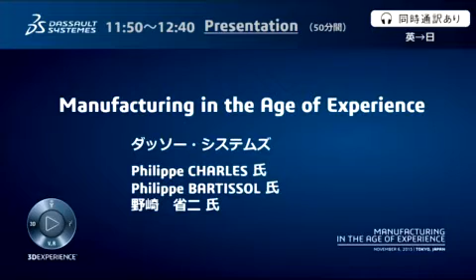Good morning. It's a great pleasure to be here. Thank you very much for joining this manufacturing event. It's my pleasure to share with you what we are doing at Dassault Systèmes to support this manufacturing transformation.

Up to now, we do see manufacturing being more a race for productivity. This race for productivity has been delivering tremendous value and benefits to serve customers in multiple industries.

What we see coming now is also a race for innovation. Innovation is everywhere when it comes to product, and you heard a lot of great cases this morning. Innovation is also there

for manufacturing. Manufacturing innovation is for sure part of the transformation that we see coming, as important as the race that has been ongoing for productivity. The digital transformation mentioned several times this morning is for sure a key enabler to make possible and support this innovation process.

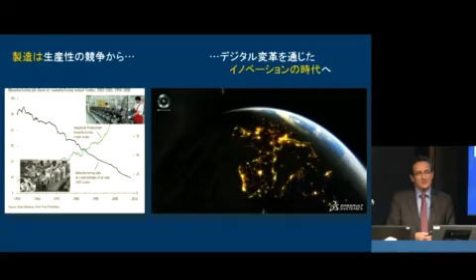When we talk about digital transformation, it's not only about transforming existing processes, not only digitizing existing processes, but also the opportunity to change, to transform the way things are done in the manufacturing world within the global ecosystem, and also take advantage of the possibility of changing business models.

As part of this digital transformation, the so-called digital twin of manufacturing and production system is a key enabler to support this transformation, and a key enabler to allow the reconfiguration and recomposition of the value chain, which is a key driver in this business transformation.

This digital twin of production system applies at all levels of manufacturing, from the simplest station as a manufacturing capability to the whole production system as a network of manufacturing resources.

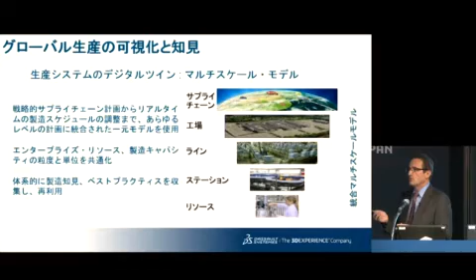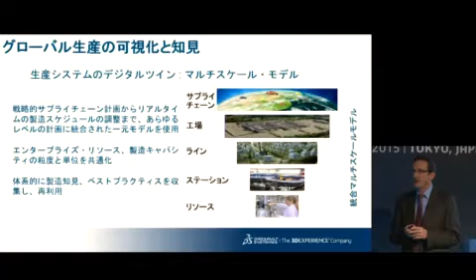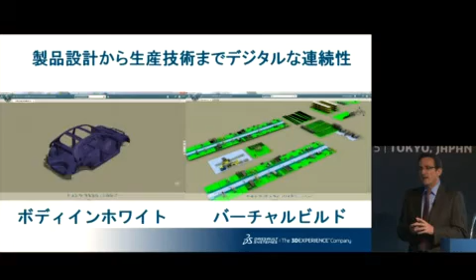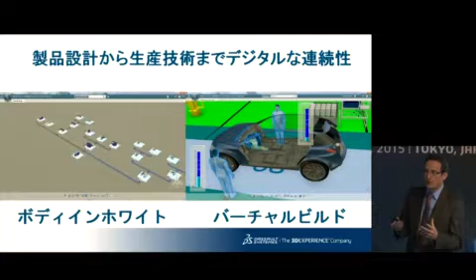And this is the opportunity to enable collaboration across disciplines, collaboration coming from the product engineering activity, which is key and enables real collaboration, leveraging the digital asset, the digital definition of the products, including all its innovation. So the production engineering could be completely developed, planned, tested, and validated in the virtual world.

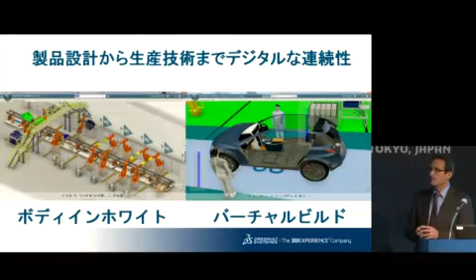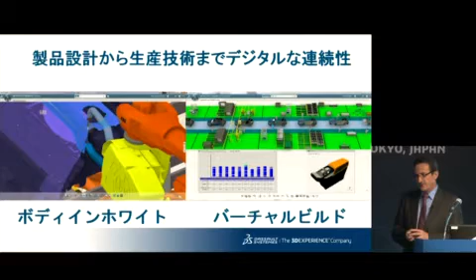Here in front of you, you see two examples. One is coming from the automotive industry, the standard process of body in white, where the complete digitalization of the body of the car is a key enabler that could be leveraged in the production engineering activity.

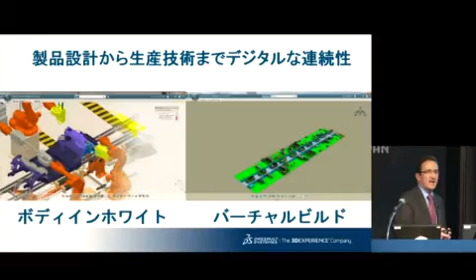This could be completely tested and validated in the digital environment, avoiding any prototyping, which is of huge benefit, of course. And we see that ongoing.

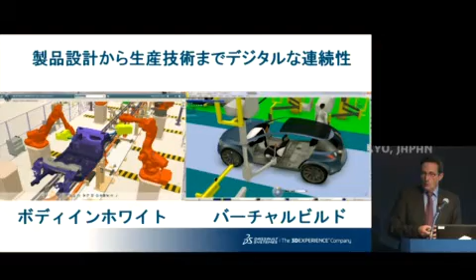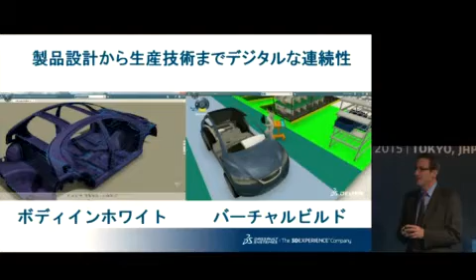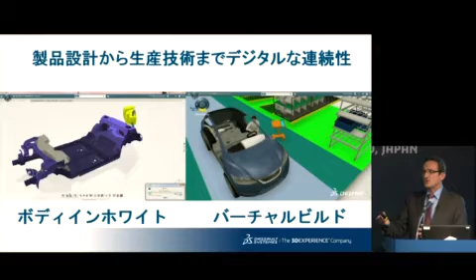What you see on the right side is the final assembly process that we call virtual build. You're basically virtually building a car before any hardware prototype exists. This is of tremendous value and benefit to significantly reduce time to market on

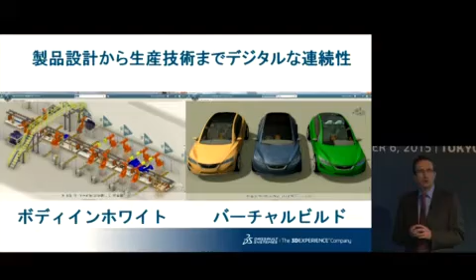a global basis. You'll see this afternoon a great presentation about this case from Honda, within the so-called global manufacturing system for Honda. You have it in the agenda.

The digital transformation, the digital modeling and the digital twin of the production system also enable this collaboration from production engineering to the shop floor, where again all the digital asset created in the design of the product, and in the production engineering phases, can be made available on the shop floor.

Available from the shop floor worker, so they could get all the information for every single product that they have to build. And usually they are different - in this case, each airplane is different one to another.

How having this digital asset available at the fingertip of the shop floor worker is of tremendous value - it's a digital transformation to make available the right information at the right time and streamline operations on the shop floor, all available on any type of mobile device.

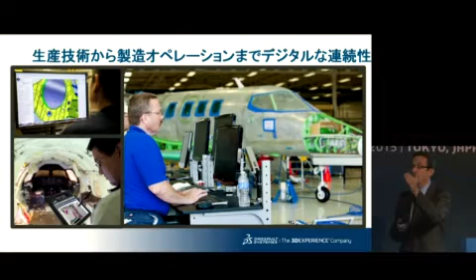We have a great illustration of this coming from Embraer, that fully implemented this for a complete airplane program, and of course got huge benefit from this digital continuity from product design to production engineering, and from production engineering to production execution on the shop floor.

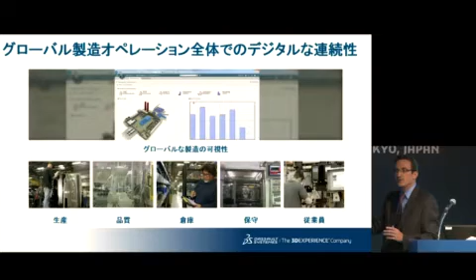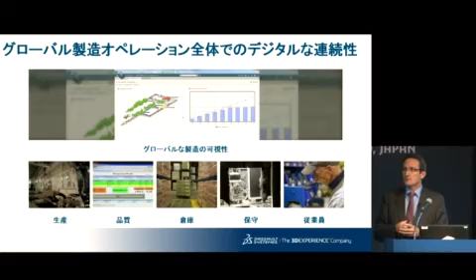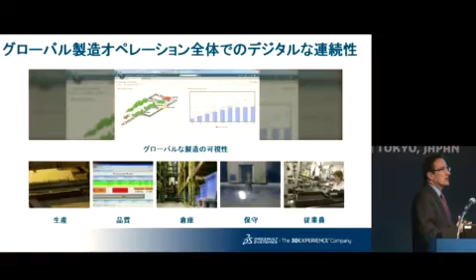This digital twin of the production system also goes across all production activity on the shop floor, in the plants, within the extended enterprise, harmonizing and synchronizing all activity: production execution, logistics, warehouse, material synchronization. So all those activities could be streamlined, digitally synchronized to reach the level of efficiency required.

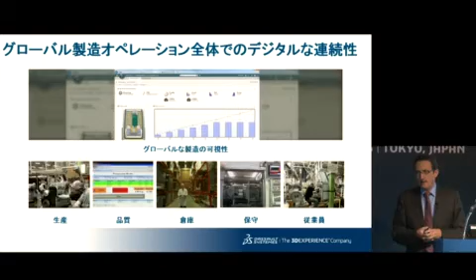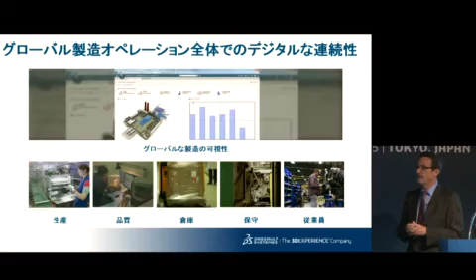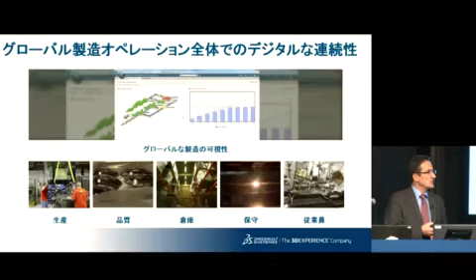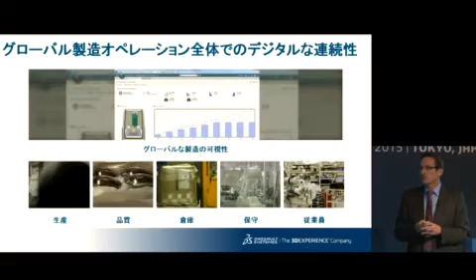As this is available, the data collection and dashboarding of your business at the manufacturing level is affordable. You could dashboard all the data from the real execution world to analyze and define what needs to be improved, based on real data and global visibility, given through this continuity on the digital thread across the enterprise.

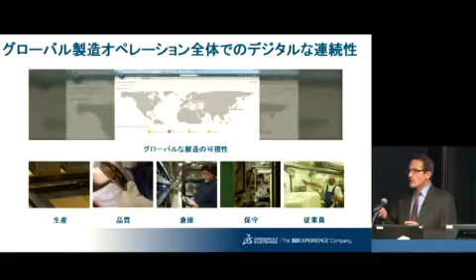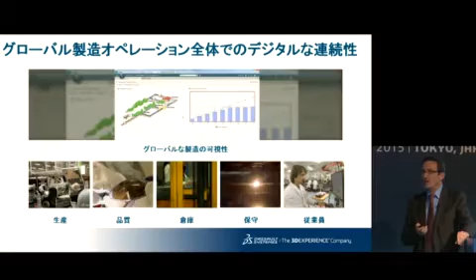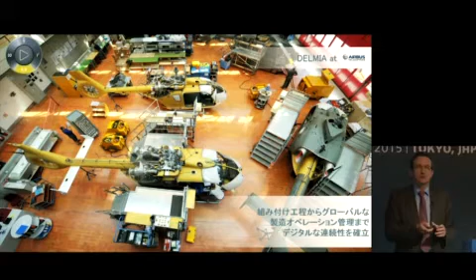This is a big transformation for sure, but we have a great example of an ongoing implementation of this at Airbus, particularly in the helicopter activity. I'd like to share the video that goes with that. So let's see what the video shows.

Airbus Helicopters is the world's leading civil and military helicopter manufacturer. In the context of market global leadership, sustaining this position requires the ability to deliver innovation rapidly so as to stay ahead of the competition and industry technology standards.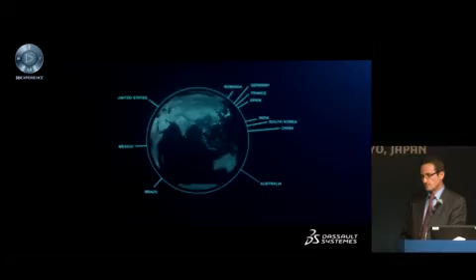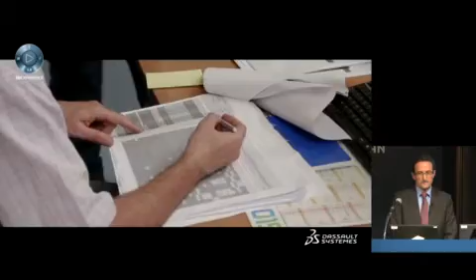It is also about the ability to rely on manufacturing capabilities that strengthen production best practices and offer flexibility to react to market demand. From the machining of elementary parts up to the final assembly lines, the helicopter manufacturing process is spread across different specialized workshops in which highly skilled personnel operate every day. Today, information is collected and transcribed on paper before being recaptured in the ERP system. Managing this supply chain complexity requires real-time information sharing, a key element of a fully mastered production process.

Every day, unplanned events happen on the shop floor: missing parts, compliance non-conformance, or machine breakdowns. Each of these events starts a chain reaction that disrupts activities of companion processes, which then impacts the supply chain, lead times and WIP levels, ultimately lowering overall efficiency.

Moving a step further along the digital transformation journey, Airbus Helicopters and Dassault Systemes are joining forces to implement Delmia Apriso Manufacturing Operations Management System. By removing paper from production workflows, digitizing information and making it available on any desktop or mobile device, it will be possible to better streamline processes and get more control over supply chain operations.

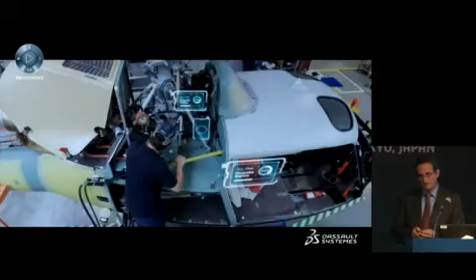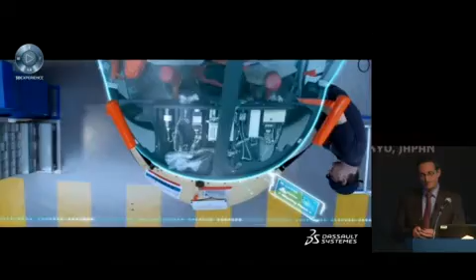Improving visibility to a real-time view on production events makes it much easier to acknowledge shop floor events, assess them, and then make decisions to synchronize activities that best react to the situation. This new solution will provide everyone with a clear and simple view of their objectives for the next operation, at any time and in real time, using a mobile device or looking at hands-on screens. This new process enables the right person to find the right information quickly and then take action.

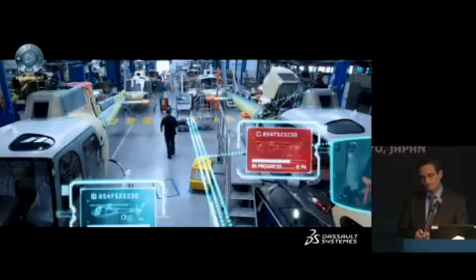This digital future factory will bring efficiency and effectiveness all along the supply chain. This strategy can allow Airbus to better master their supply chain and build to rate. In the end, it will result in the achievement of manufacturing excellence at the heart of each and every Airbus helicopter.

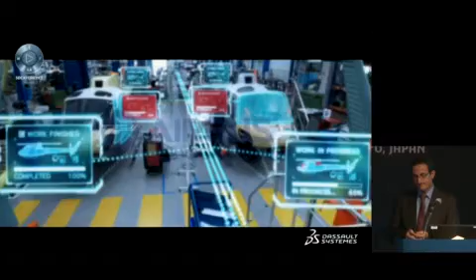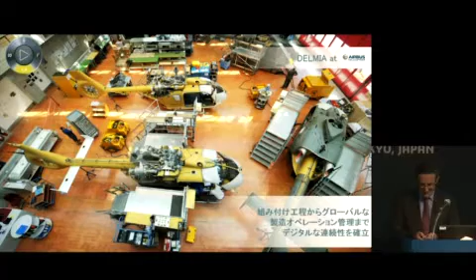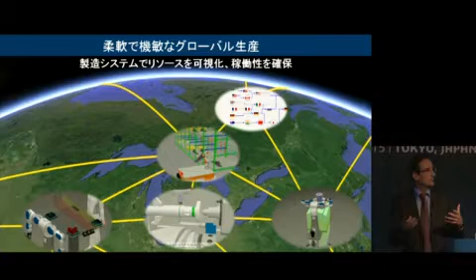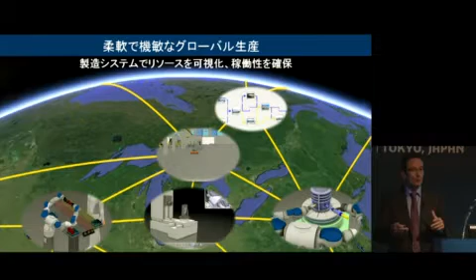So the journey is going on. This is a great illustration of what's going on in this company. As part of this digital transformation, at the end, all manufacturing resources are connected within a digital network. All the manufacturing service capabilities are bringing manufacturing services that could be configured and reconfigured to produce as the demand requires.

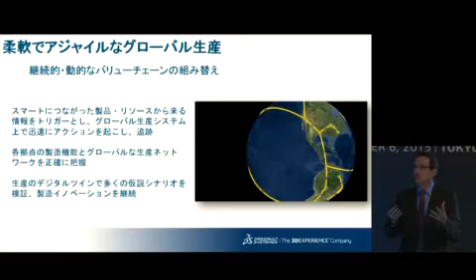Of course, those manufacturing resources are usually industrial equipment that is getting connected, getting smarter. This composition and recomposition within the overall manufacturing system gives the ability not only to have visibility, but the opportunity to make this network operational. So as the demand requires, it gives the opportunity, on a global basis, to connect, reconfigure, and recompose the value chains to serve each customer with the products he needs, wherever he is in the world.

As part of this Dassault Systèmes, we are really connecting the real world of manufacturing to the virtual one, so the virtual world can help improve the real one to serve customer requests. For that purpose, we have integrated an overall portfolio to cover all activities that streamline from product design to the shop floor, from product design to production engineering. With all digital manufacturing activity, we give the chance and a digital environment to validate how you're going to set up your production system and manufacturing system in the virtual world before going into any type of prototyping in the real one.

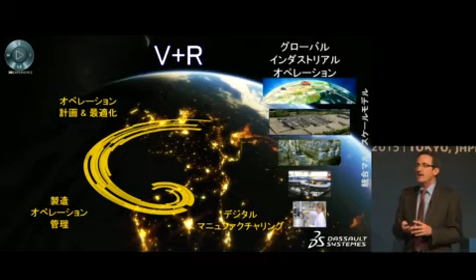Manufacturing operation management in the plants, on the shop floor, gathering multiple sites, multiple production systems, and of course, operation planning and operation optimization at the supply chain level.

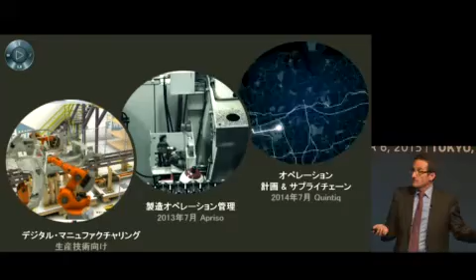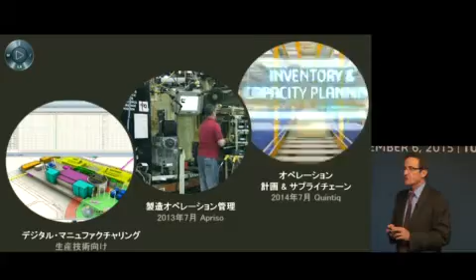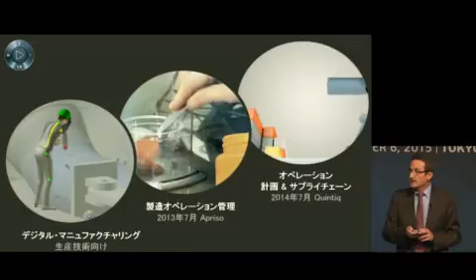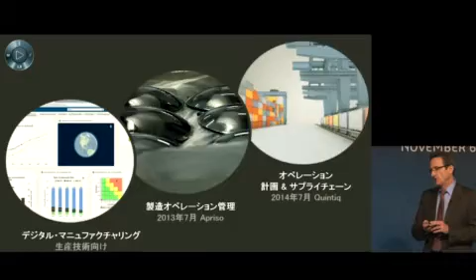To make that available, we have invested significantly at Dassault Systèmes to get the proper technology and portfolio, with recently the acquisition of the company named Apriso, covering all the scope of manufacturing operation management on the shop floor in the context of multiple sites in the extended enterprise. And more recently, the acquisition of the company named Quintiq, with great technology related to operation planning and operation optimization at all levels of the manufacturing system, and at the level of supply chain, including all aspects related to logistics.

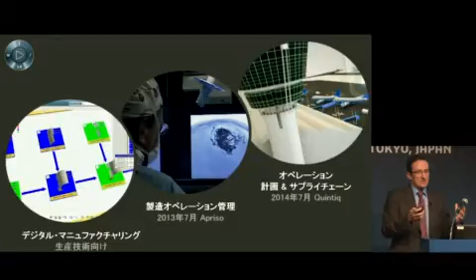So we are bringing together this technology, delivering, in the few cases you have seen here, tremendous value when it comes to getting product innovation to the market in a timely manner, in a timely manner to the global market, by reducing significantly this time to market, which is an opportunity for increasing the top line of your business.

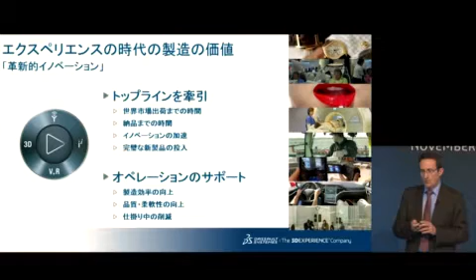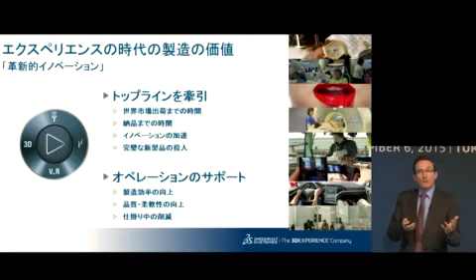And of course, while managing and streamlining all activities at the production level within the extended enterprise, including the supply chain, it's really about streamlining the manufacturing operations within the extended system with the suppliers. So significantly, the productivity and the manufacturing efficiency at large could and will be improved significantly. It's really driving the opportunity to get product innovation delivered to the market in the most efficient way, completely leveraging the digital transformation and the digital thread from product design to delivery to the customer.

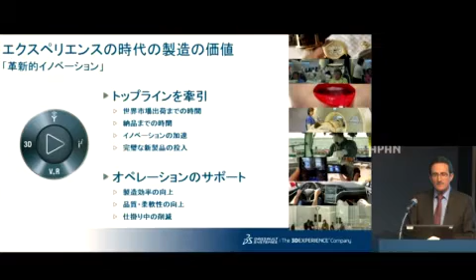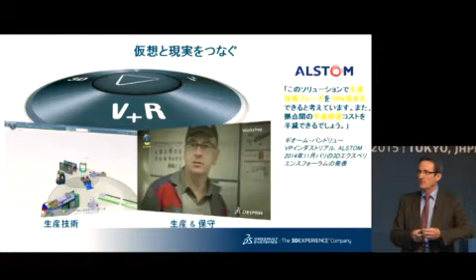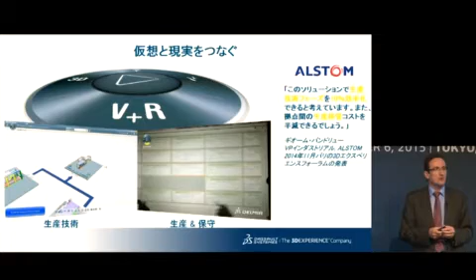Also connecting here the real world to the virtual world, you'll see a presentation this afternoon from a great customer we have, Alstom, for trains, which is really also showing how they are streamlining all their activities for developing new trains for the world by connecting the real world of manufacturing operations to the virtual one, and how the overall process is significantly improved with significant savings, as you can see here.

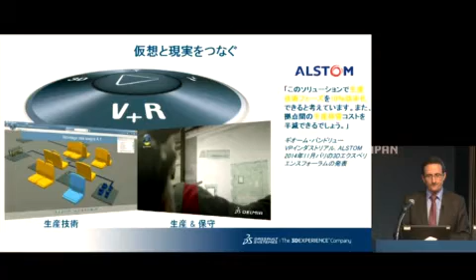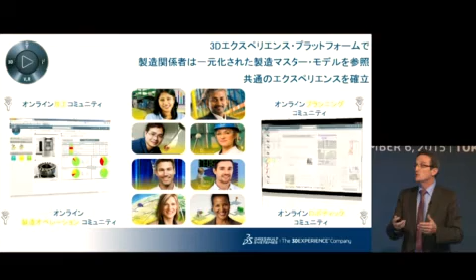While we do this digital transformation, this digital asset created gives the opportunity to connect all stakeholders from design, from production engineering, from manufacturing, from people on the shop floor, on a common environment through the internet. This is what our 3D Experience platform at Dassault Systèmes is providing, the opportunity to bring those communities together in order to bring product innovation to the market.

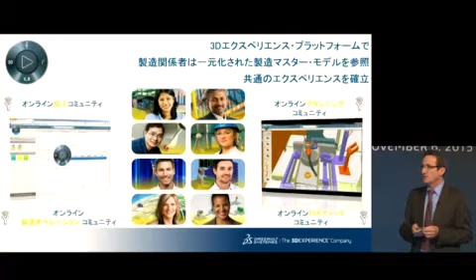So it's, at the end of the day, an opportunity to connect people in the extended enterprise with suppliers, whatever the size of the company, for collective innovation. At the end, it's an opportunity to put people at the center of the innovation process, to connect them, to have all of them having easy access to the internet, to a platform where digital assets are available, and we make that available on the cloud, where all those communities can work together and put people at the center of the innovation process, not only for product design, but also for manufacturing innovation.

And I truly believe that this is a great opportunity to make manufacturing attractive enough to the generation to come, who all love working on the internet. So we are investing.